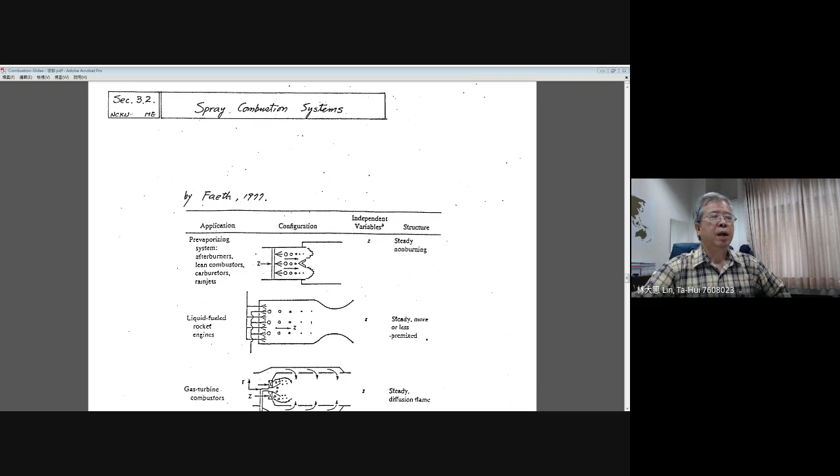And before we learn the detailed spray flames, you need to know the systems you may have for practical applications. Now we move to page 3.15, and we introduce some spray combustion systems, and those materials are taken from the textbook from 1977.

Actually, he has a new version, but unfortunately, the professor already passed away several years ago, maybe even earlier. I forget the exact time, but he's a very famous guy in combustion.

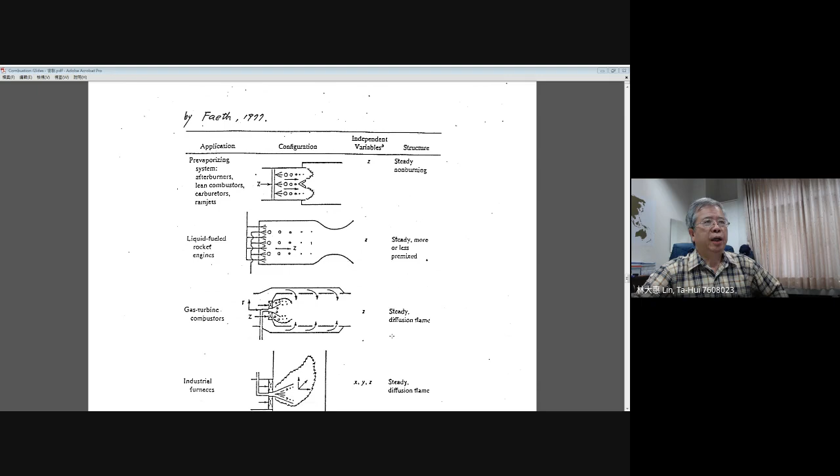Now, let's look at several applications to let you know how to analyze spray flame behavior. The first example is a so-called pre-vaporization system. Pre-vaporizing system means that you use a liquid spray, but before combustion, all the liquid is gasified. That means when you move to the combustion region, you do not have a spray, you do not have droplets.

Basically, they provide fuel vapor to mix with the oxygen in the air, and then they go through the combustion process. In this sense, the spray itself is a non-burning spray. Burning happens in the gas phase. A typical example of pre-vaporization systems, and later on I will show you more precise pictures, is the so-called afterburner for fighter aircraft.

And the lean combustor carburetor typically used for automobiles, right? But the carburetor is already phased out. Not too many carburetor cars are still in the market, right? With a carburetor, the mixing of gasoline and air occurs before the spray moves into the combustor in the engine.

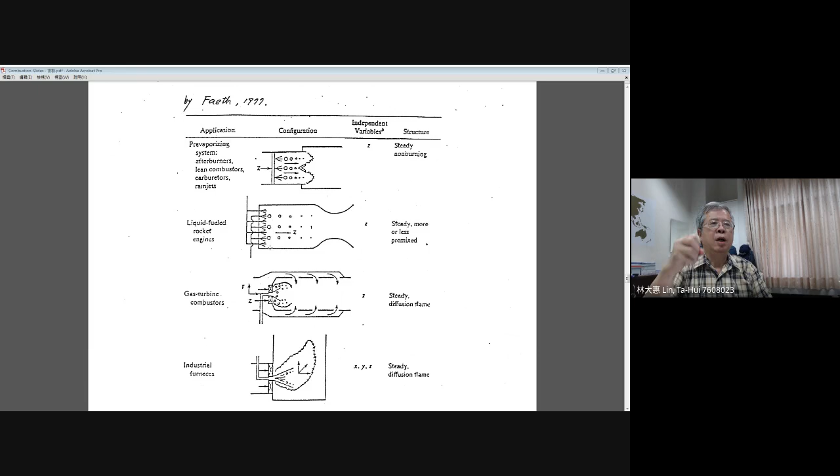For these kinds of spray combustion, they can contain both the diffusion burning from the droplets and also the premixed type. Later on we will have a certain discussion on this.

Now the third one is the more general application, the gas turbine combustor. Usually we use this for aircraft. You suck the air from the surroundings into your gas turbine combustor, and the flow separates into two streams. One stream just moves into the combustion chamber; we call this the primary air, and the secondary air flows to the annulus of your combustor, and later on flows into a different downstream area.

Actually, the secondary air works as the cooling fluid to quench the heat absorbed by the liner of your combustor, because the gas turbine is attached to the aircraft. Usually in the combustion chamber, you need to take away the heat absorbed by your combustion chamber.

For example, for diesel and gasoline engines, it is very hot inside your cylinder, and that heat is absorbed by the cylinder wall, and you need to take that heat away. Otherwise, the material will fail because the temperature is too high. For the car, you can carry some water to cool it down. But for the gas turbine, we use the air coming from the outer environment.

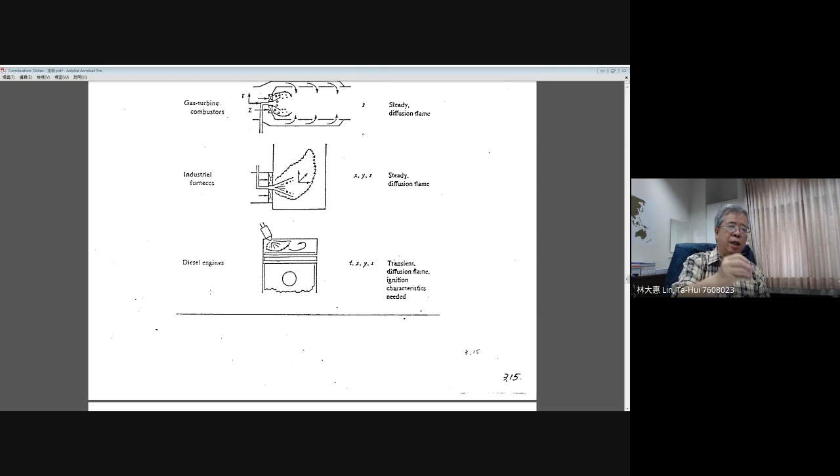When you inject the diesel spray in, it starts burning continuously along with the time variation. So the spray burning in this sense is transient, and several things occur simultaneously in the process of burning. For example, when the diesel spray is injected into this high temperature region, the spray coming out first experiences atomization. It produces tiny droplets, and the tiny droplets meet with the air inside your cylinder and mix.

When the mixing process completes to give a suitable concentration for ignition, ignition occurs. The flame will exist in the process, and it will enhance the burning later on, finish all the droplets coming out and complete the combustion process. So when considering the burning of diesel sprays, you need to understand this is transient, and basically diffusional, because the spray is initially separate from oxygen.

But remember, when you define a premixed flame or diffusion flame, it is usually based on the initial conditions. In a real combustion field, especially downstream, you always find a certain degree of premixing occurs. You cannot have a very distinct boundary between diffusion burning and premixed burning. And here they mention that ignition characteristics are very important for diesel spray combustion. In this case, the spray burning not only depends on the three-dimensional coordinates, but also changes with time.

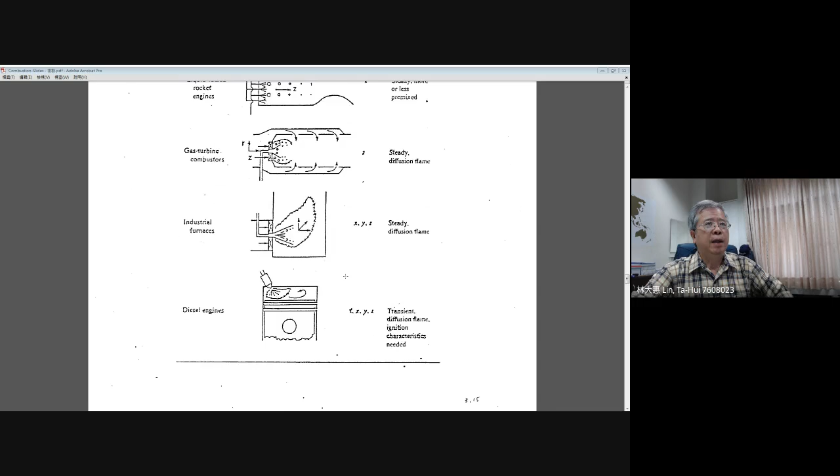Okay, that means for the analysis of diesel engine combustion, you need to think about the more complicated flow structure you may treat. Okay, and I try to give you some understanding of the differences in spray burning in different applications. Okay. Now I give you some examples to let you know how to do the simulation.

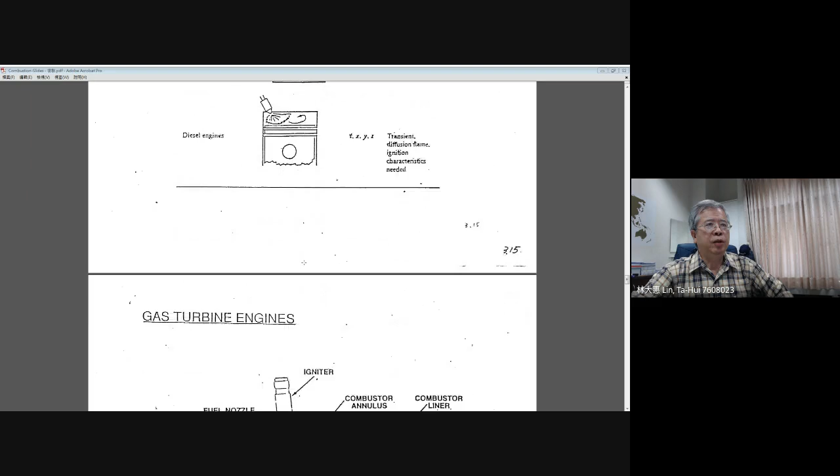For example, this is a typical one for gas turbine engines, and this is a layout for a common gas turbine engine. As you mentioned, in front of a combustor there is a diffuser, and they also have a compressor ahead of the diffuser, and they will push the air coming into the combustion chamber as two streams. The center stream basically is a primary stream. It will go along with the liquid fuel from the nozzle, and then the mixture will come up as combustion in this combustion region.

But the secondary air will move around the combustor annulus. Okay, and there are some liner openings. They will allow the cool air to flow into your combustion chamber, and this cool secondary air basically can cool down and absorb certain heat from the liner to protect the materials of your combustion chamber surface. Okay, and in this case, you can think about the spray operation. Injection is continuously supplied for the burning.

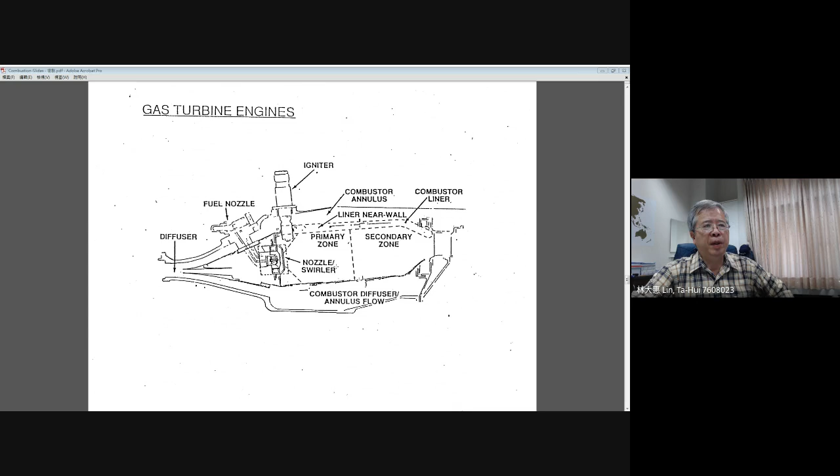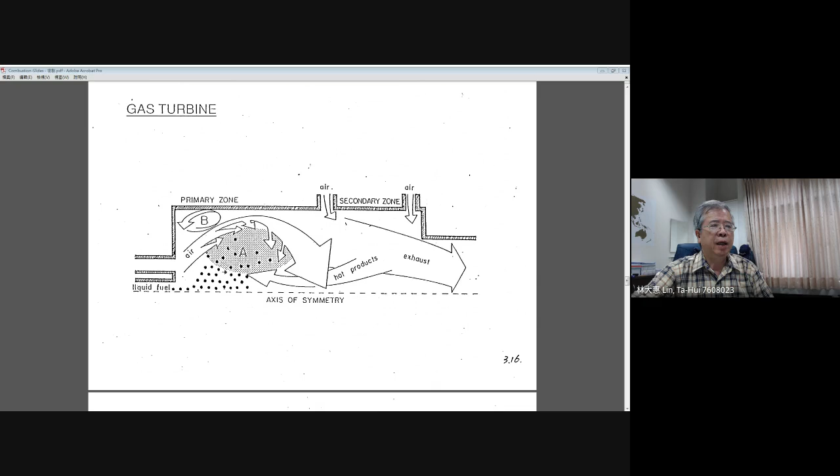Then, if you try to analyze these problems, think about it. Here is the example. You can see since we mentioned there is the one-dimensional flow, right? One dimension along the axis of symmetry. This is a variation along, for example, the z-axis, but you can study it in cylindrical coordinates. Okay, now fuel is injected from the center, air comes from the surrounding, and they will produce so-called diffusion burning.

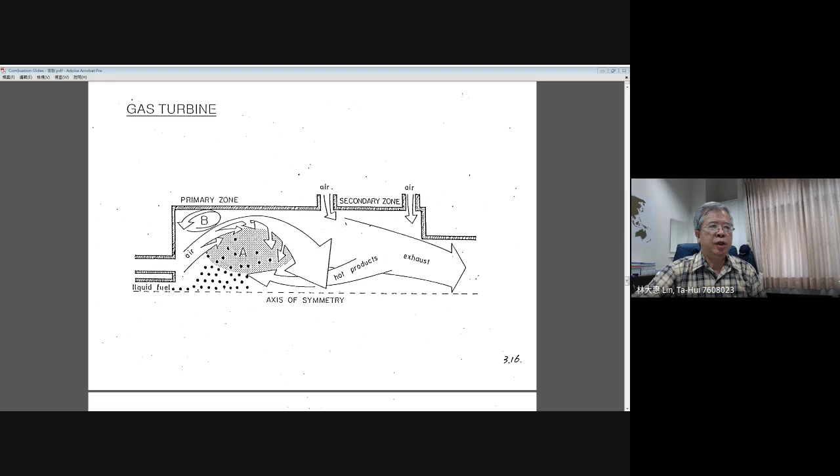Since the design of the gas turbine combustor, the flow behavior will provide a certain recirculation zone near the corner of the combustion chamber. And since they have some entrainment air, the secondary air coming in, they will produce some mixing downstream to push your hot products flowing back and enhance recirculation and mixing in this region. This recirculation mechanism is useful to redistribute the thermal energy in a large region, then it will reduce the temperature lower than the threshold temperature for thermal NOx formation. We call this the so-called low NOx burner mechanism.

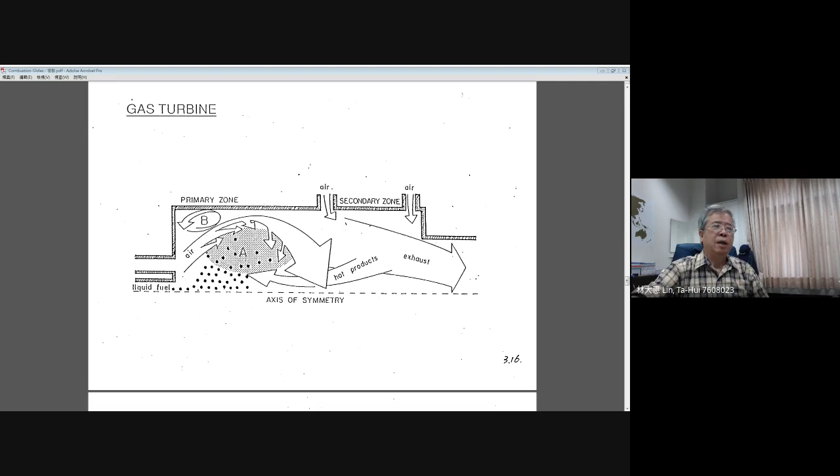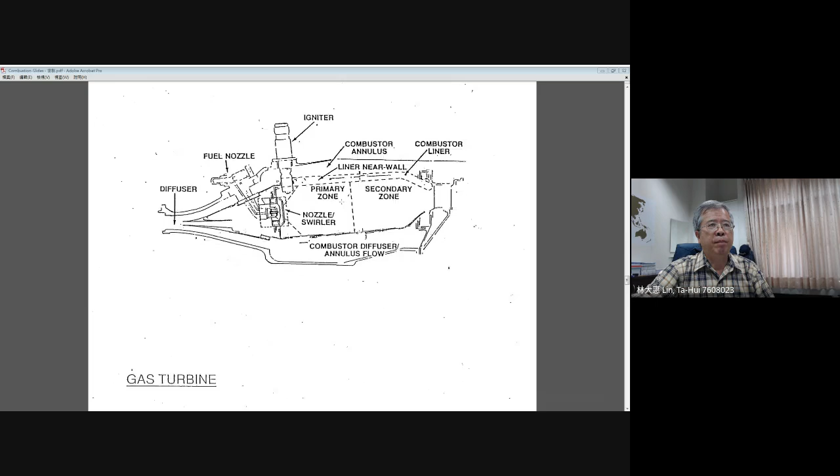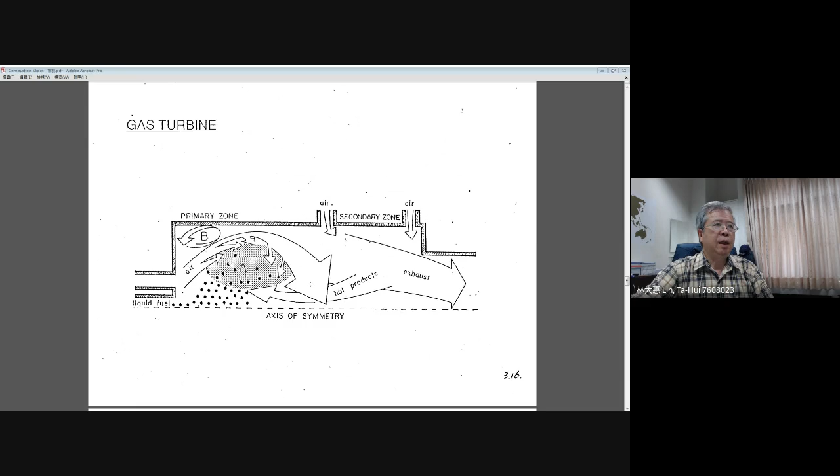I will show you later. But here you can think about these descriptions based on this geometry, which can probably simulate the real combustion process in a gas turbine. Okay, and here they tell you there's some droplet size distribution, burning occurs in these regions, and when they finish the gasification, mixing and burning, then the hot products will move to the downstream side, and the exhaust hot products later push the gas turbine to operate. Okay, this is the combustion process for the gas turbine. And for industrial furnaces, let me change the slides.

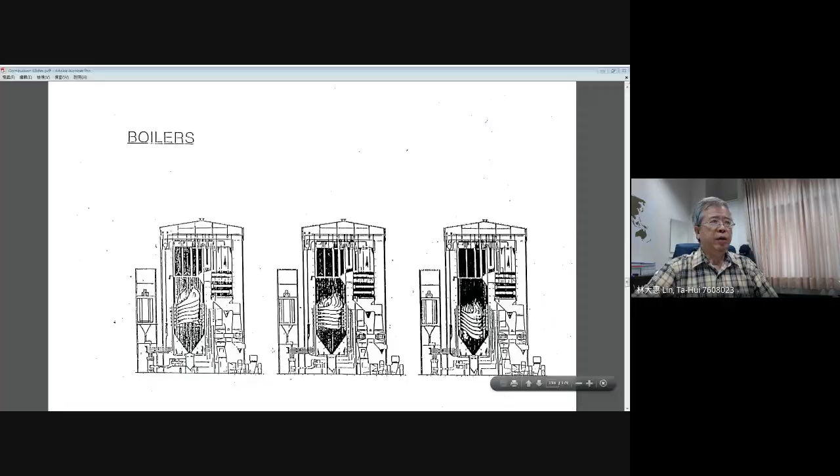Okay, I give you a typical example of burning in a boiler. Actually, this is another good example for spray combustion. Basically, I took these figures for burning of pulverized coal. But you can figure out that the flame structure is very similar for the spray flame compared with the burning of pulverized coal. Okay. Here, the left-hand side represents the pulverized coal system. They crush the coal into very tiny coal particles, and those particles are pushed by the air and blown into the interior of your boiler, and they have different nozzles to inject the coal particles to burn with air.

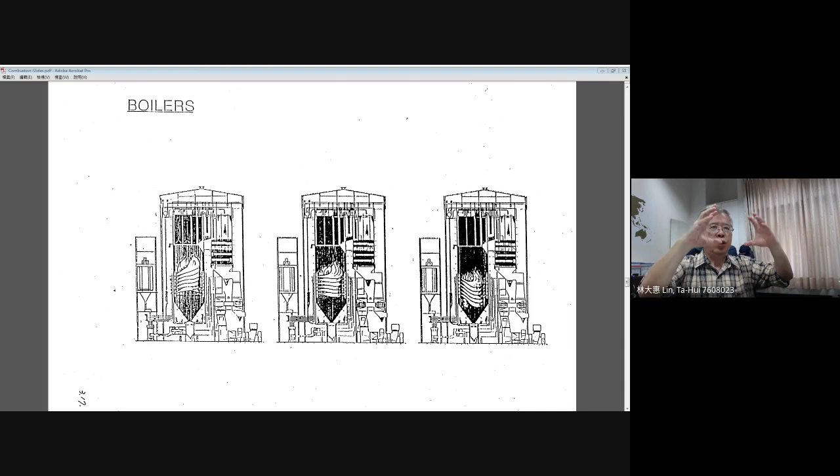Then you can see there is a flame. And this flame basically tells you this is a three-dimensional flame shape, okay? Typically this is a spray diffusion flame, or I'm sorry, I should say the pulverized coal diffusion flame. But if you have a spray diffusion flame, it's very similar to this. And from the left-hand side to the right-hand side, they try to change the angle of the injection nozzles, because when you change the nozzle, you change the flame shape, and when the flame shape changes, you change the major heat release region up and down.

For example, the left-hand side tells you the major heat release region is almost in the center part of your boiler, but later you can see the flame shape is more horizontally injecting out. That means the hot regions decrease to the lower portions.

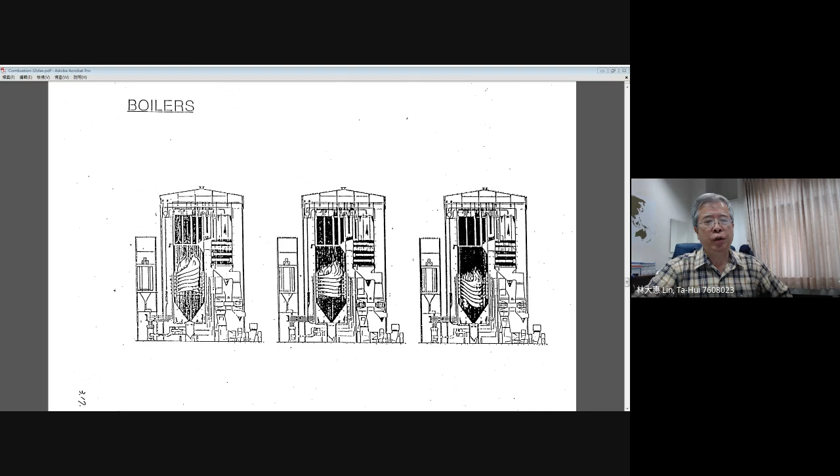And on the right-hand side, the injection of your coal particles actually has an angle pointing downstream to the lower portion. Then the whole hot region will move more to the lower portion. By this kind of change of the angle of your injector, you can change the loading of your furnace.

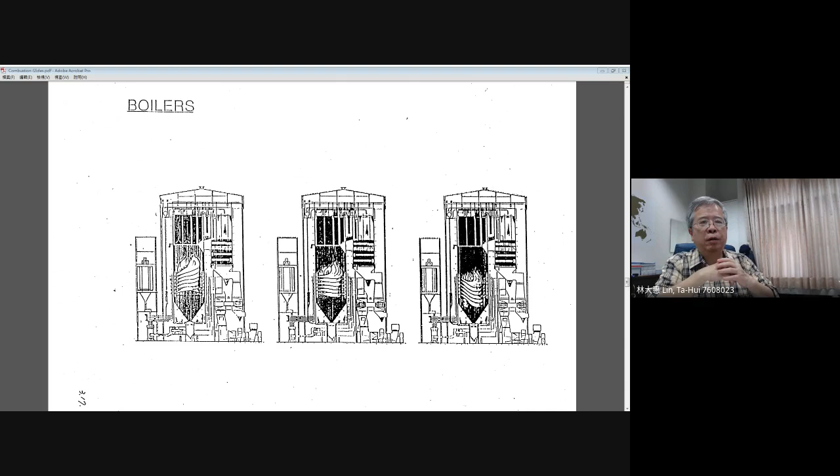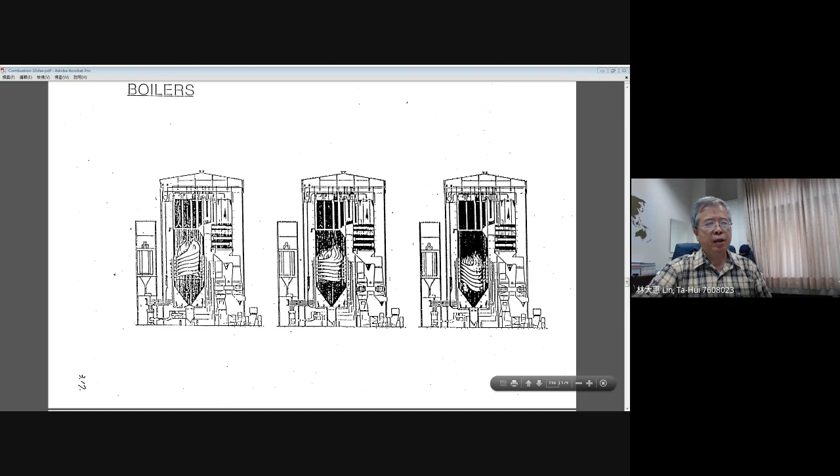Okay, but I just want to tell you this is a typical flame shape for pulverized coal flames. And actually, for the spray cone, if you burn heavy oil in a boiler, you still can have this kind of flame shape. Okay, this is a three-dimensional spray flame, but it is steady since all the boiler operations are continuous.

Okay, now we go back to tell you some formulations for furnaces, and give you an example. For example, this is an incinerator. The structure of an incinerator is very similar to the industrial furnace.

Okay, here in the incinerator, they will give you some solid feed, because you hope those kinds of solid materials, for example the waste, get a certain heat to have thermal pyrolysis. Actually, you will provide a stable spray flame, okay, and a steady burning.

But in this case, the solid materials will feed continuously, and they will exit. In this case, they will accumulate closer to the surface of your whole incinerator. But usually for the mixing, for good heat transfer, you need to make good mixing by turning the incinerator. If you look at the cross section, actually the whole combustion chamber is rotating.

Okay, and the thermal radiation coming from the flame will transfer heat to your solid material, and some heat will be followed by convection, and some heat by conduction out. But when you look at the thermal pyrolysis for the solid materials, you will find initially they have a thermal decomposition because they absorb heat.

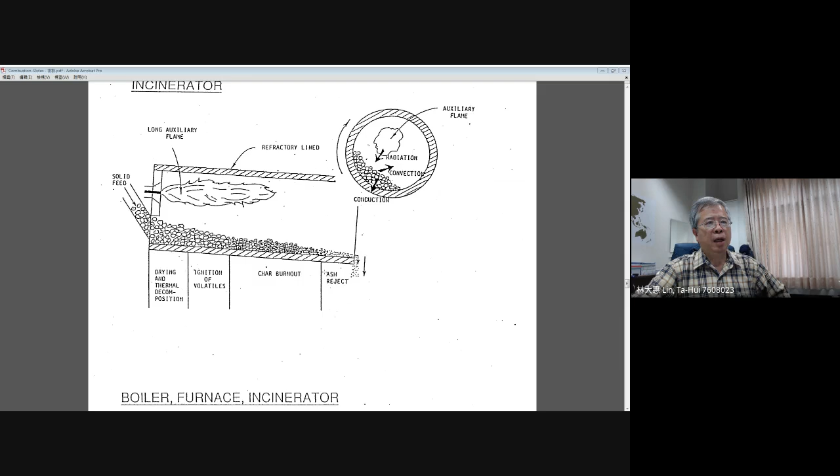At the first stage, they will release some low boiling point volatiles or water. Then they will start to have some ignition of the evaporated vapors. Then finally, they just remain some solid particles, especially if they have some carbon, and the carbon has surface burning on it, and finally it becomes ash and is ejected out.

In this kind of combustion process, you may try to analyze it based on these mechanisms. You have fuel coming out and air coming from the surrounding. That condition is very similar to that for the gas turbine. The difference is, at the boundary of your combustion chamber, you should consider there is some heat coming out.

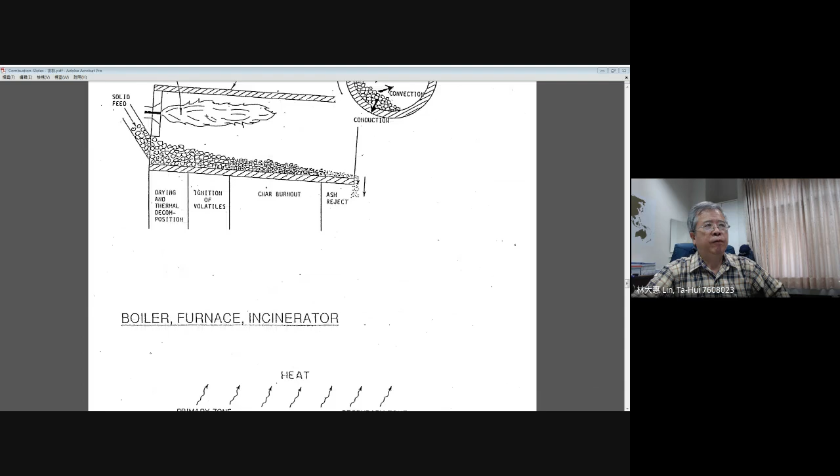Okay, that heat will be used for heating the water in the boiler, or the heat required for the thermal pyrolysis and burning of the solid materials. Okay, and you can think of that as just heat coming out from the flames. It may go through heat conduction or radiation out.

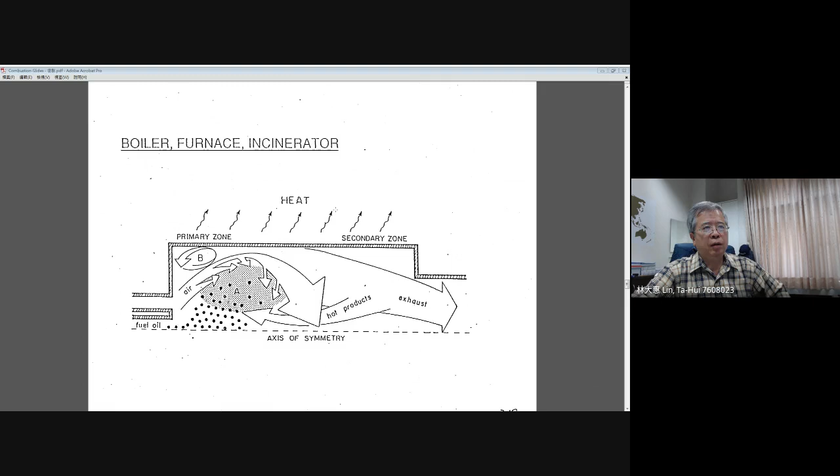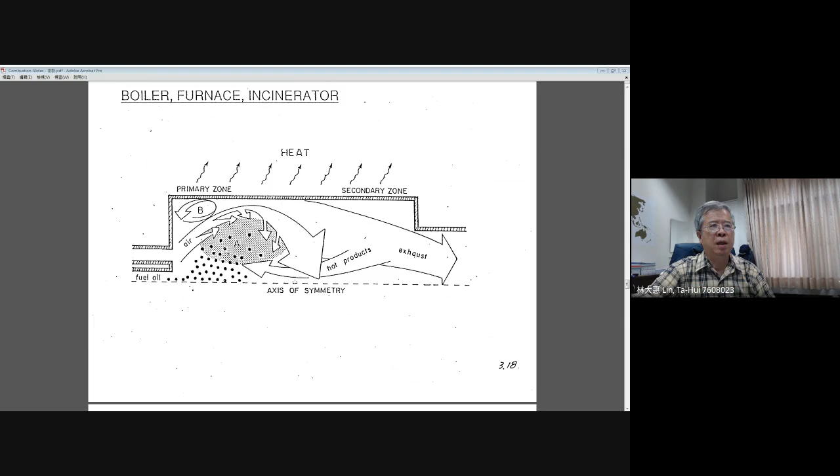Okay, and you can see those kinds of flow recirculations and flow structures. You can figure out it's very similar to the flow field in gas turbine combustion.

Okay. For the next part, I will give you some pictures to let you experience certain examples I illustrate from the lecture notes. For example, the liquid rocket engine, a gas turbine engine, and also I will give you some understanding about the diesel engine combustor.